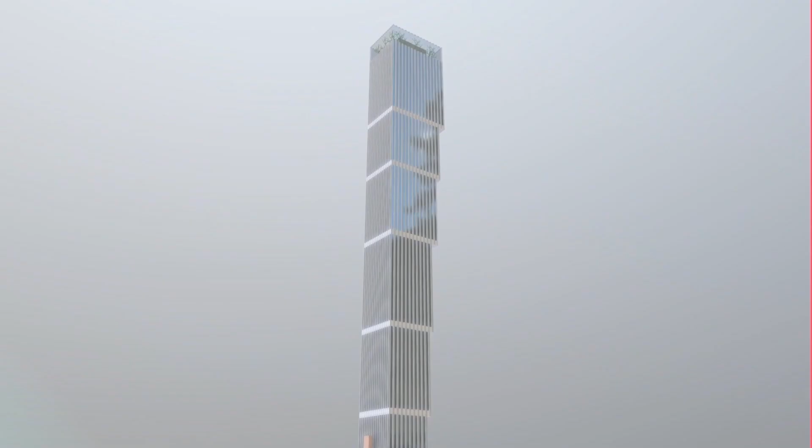Rarely do you encounter soaring towers and skyscrapers that live up to their name, but the ones we'll show you today are definitely scraping the skies. From a building that has a garden on the top to a skyscraper that has an alien-like appearance on the outside, let's take a look at 5 of these architectural wonders that we may never see on this planet. You heard it right, these mega projects are so impressive that even in a future that seemingly everything is possible, their realization is still unsure.

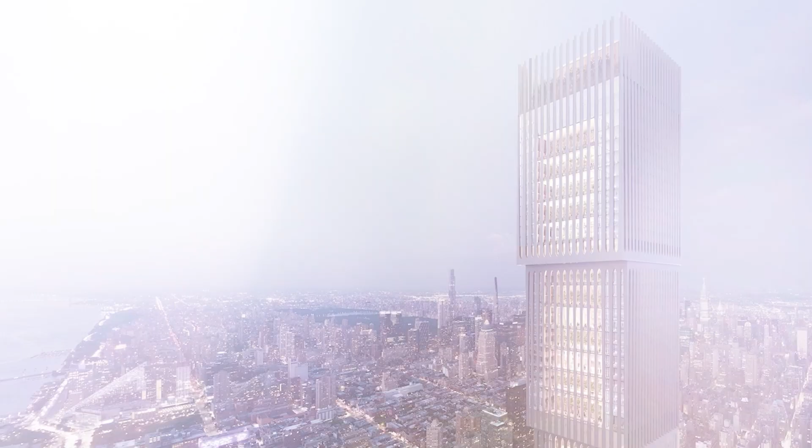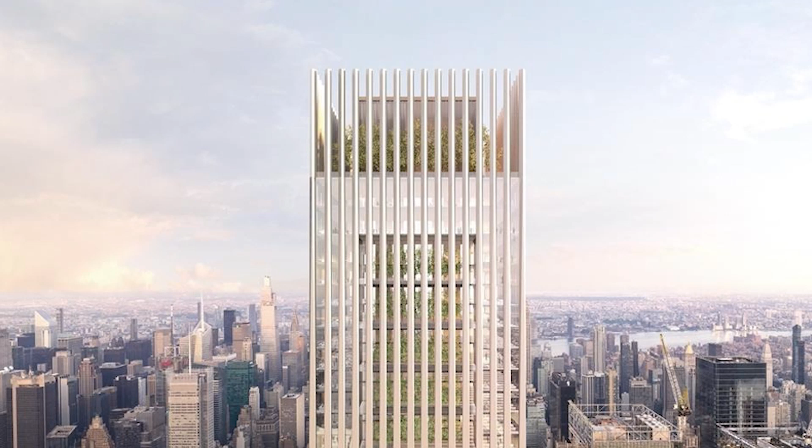Affirmation Tower. For some time now, the most talked about project that is on hold in the city of New York is the construction project of the Affirmation Tower. This 1,663-foot super tall mixed-use tower is planned to be built at 418 11th Avenue. The 2 million square foot structure would easily take the title of the tallest building in New York. Its seemingly upside-down appearance would definitely grab your attention, but it could also be why its construction is constantly getting delayed. If we ever do manage to see its finalization, we would all be in for a treat.

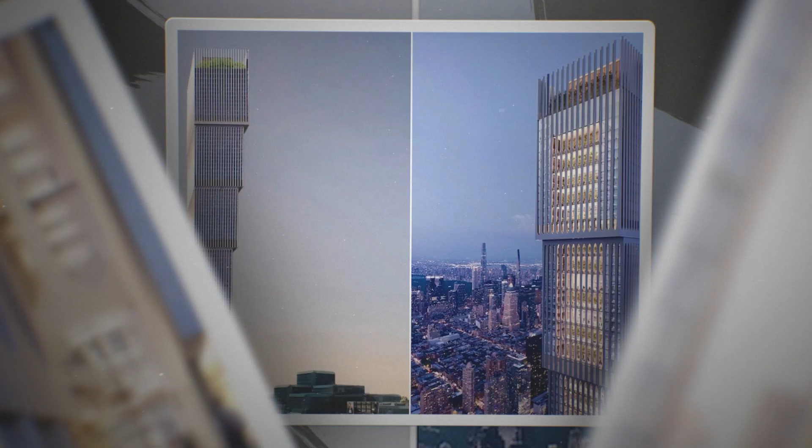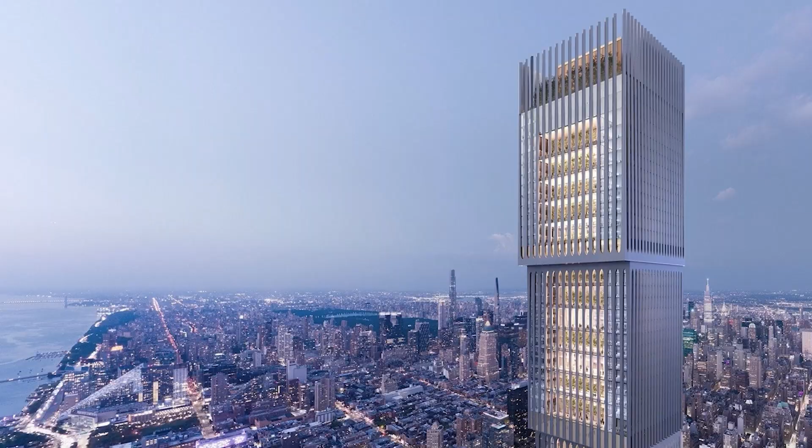Its initial plans called for the super tall Affirmation Tower to yield 2 hotels, an observation deck, a theater, public outdoor space, and office space, part of which would house the future headquarters for the National Association for the Advancement of Colored People. Developers projected the creation of 30,000 jobs in the building's construction, with 15,000 becoming permanent after its completion, and forecasted the property would generate over $5 billion in tax revenue for New York City and state over a 30-year period. The fact that entrepreneurs from minorities and female-owned companies would be among the Affirmation Tower's earliest tenants solidifies its goal for inclusivity.

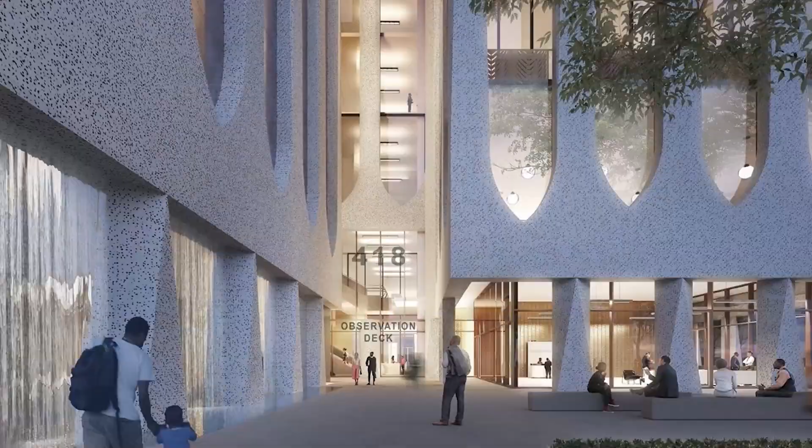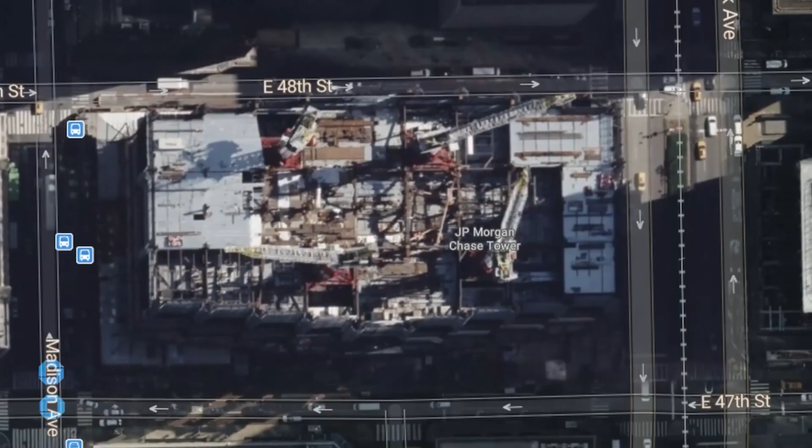Efforts to reboot the project resumed, with the concession of adding affordable housing at the expense of office space. It is unclear at the moment if a new building permit will be submitted, abiding by the new programming guidelines. It's important to note that the Affirmation Tower was developed by Don Peebles and designed by Ghanaian-British architect Sir David Adjaye. The Affirmation Tower is the work of a majority black team, including those funding the project. This project is a rare opportunity that has to be used, as it'll make the world's most iconic skyline more inclusive than it's ever been before. Its completion would be a testament to the power of unity and inclusivity.

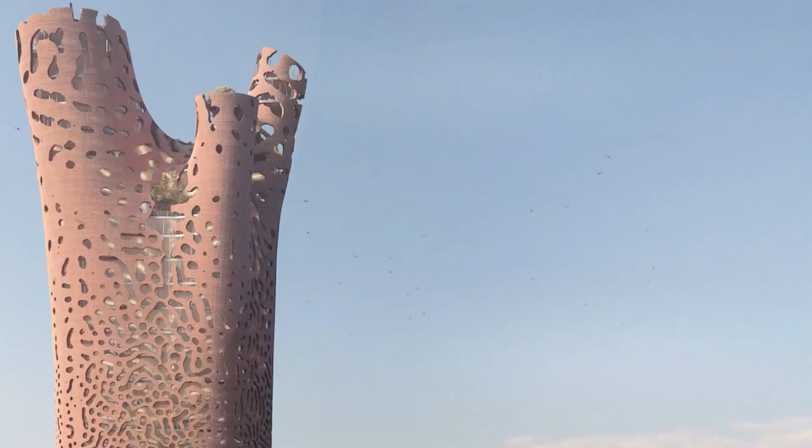Tower of Life. This next tower has such huge ambitions that it might not just become a benchmark for a country, but for a whole continent. We are talking about the unique Tower of Life, a project recently presented for construction in the city of Dakar, the capital of Senegal. This tower, as we can see, represents a tree, so it's safe to say its realization might bring forth something awesome, hence the nickname the Tree of Life. Planned to be 950 feet high with a bulky diameter of an amazing 165 feet.

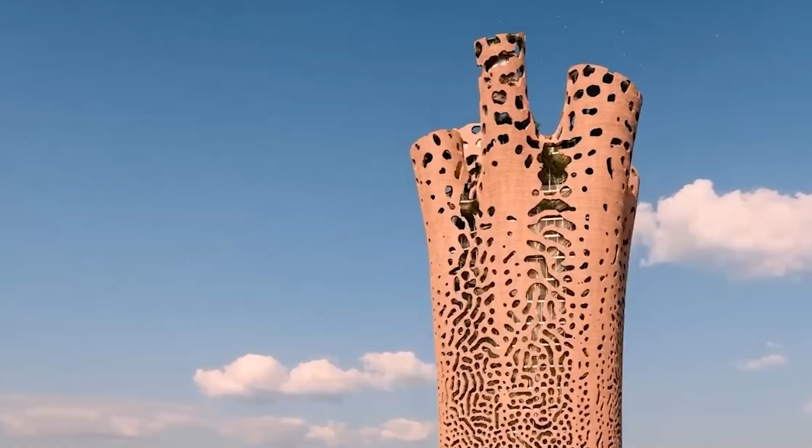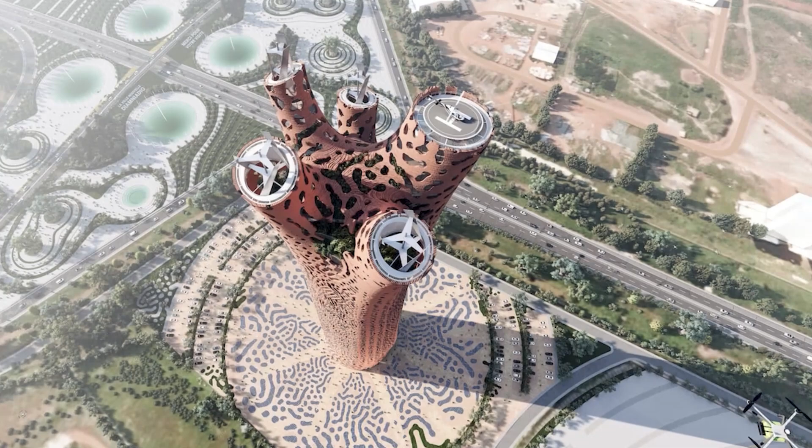This unique design that we see is not only impressive because it's similar to the baobab tree which grows in many parts of Africa, but also because of its facade, whose pattern designs respond to the shapes of an animal print. Its appearance is so convincingly biomimetic that it's also reminiscent of the large termite mounds typical of the African continent. Everything about this impressive structure, designed by Ali Basbous, screams the word Africa. This tower will be used for offices and public spaces. It'll also have numerous landscaped areas and, on the upper floors, a forest of indigenous African flora. It'll also have a heliport and vertical takeoff and landing area for drones, and many more cool and unique uses.

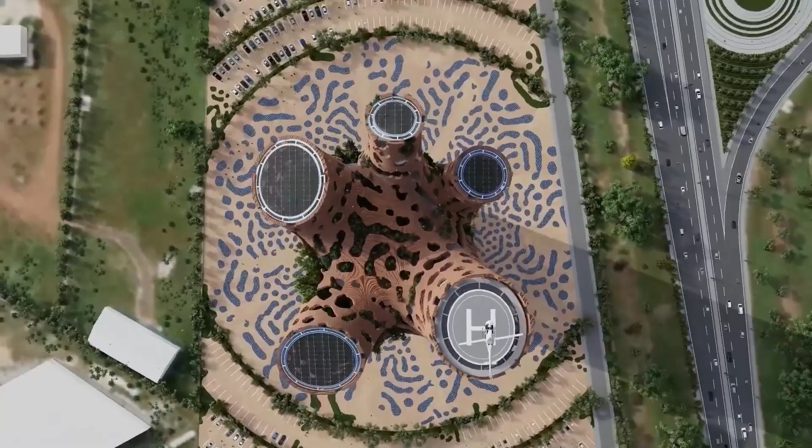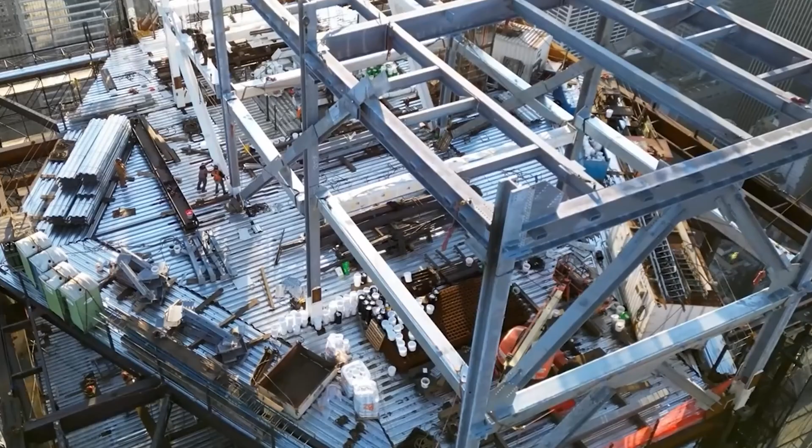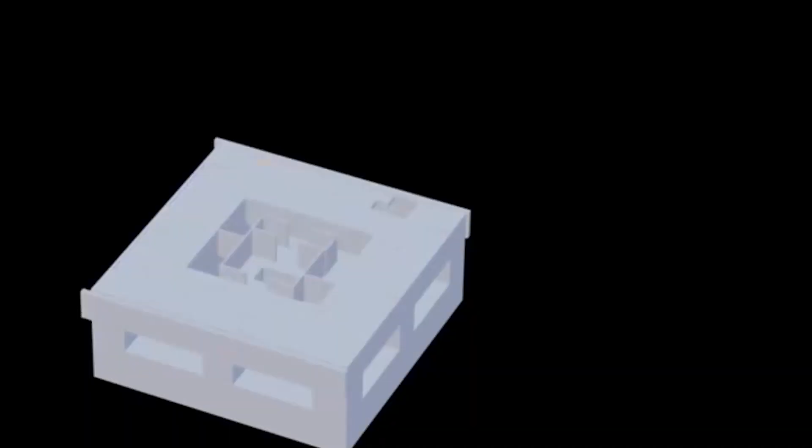The SRG Tower. Let's now take a trip to the luxurious city of Dubai, in the United Arab Emirates, or as we know it, UAE. Here, the tower with 2 wind turbines included in its structure, at an astonishing height of 1,550 feet, is planned to be made.

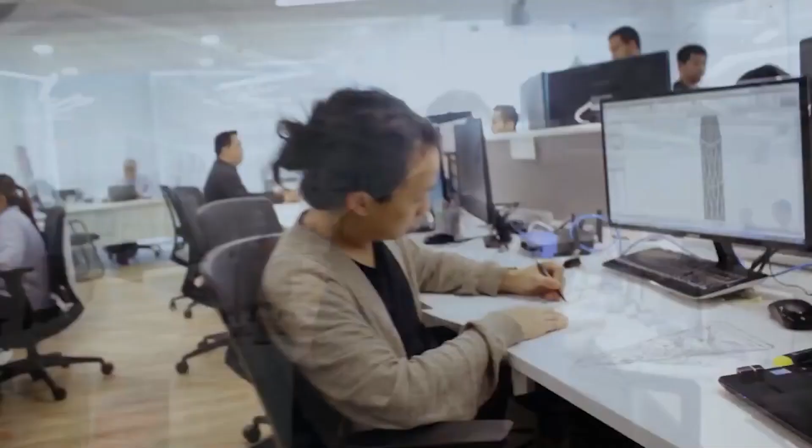Introducing the SRG Tower. This 111-floor residential mega project has been designed and architected by Killa Design. The group is famous for creating more than one architectural marvel in the city of Dubai, with a mission to create innovative buildings that are timeless, environmentally sustainable, and contextually inspired. The SRG Tower fits perfectly in this mission.

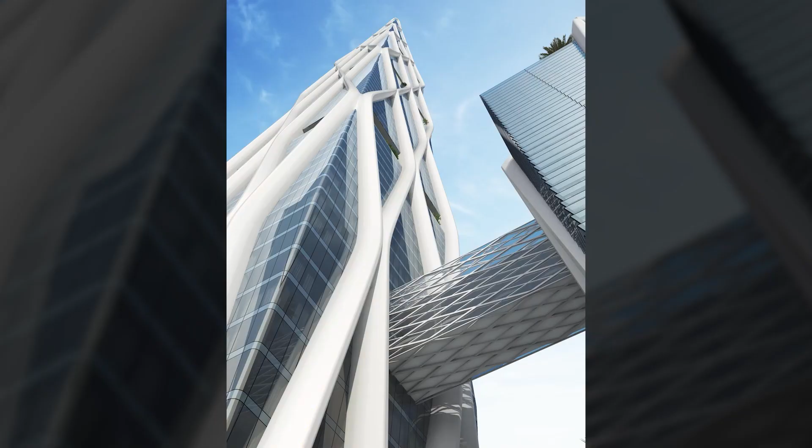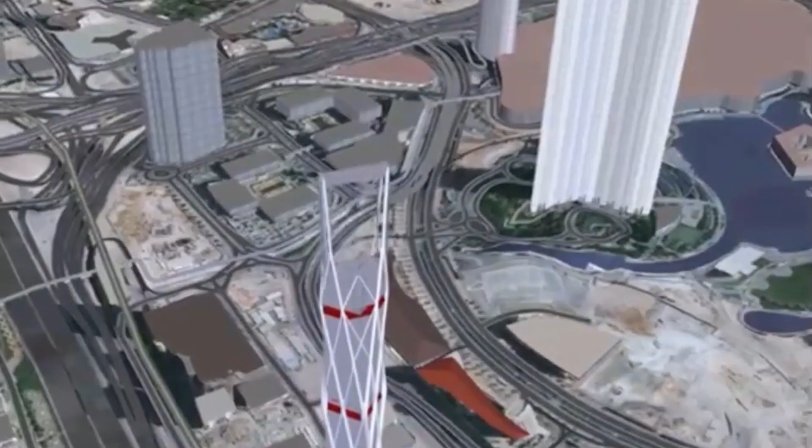Not only does it add to the uniqueness of the building, but it's also highly efficient in resolving lateral wind loads, slowing the wind across the building, therefore reducing negative pressures behind it. The design reduces the weight of the building and foundations by up to 22%, and reduces direct solar gain to the facade by 30% compared to a fully glazed curtain wall facade. The turbines are designed to create 500 kilowatts peak energy.

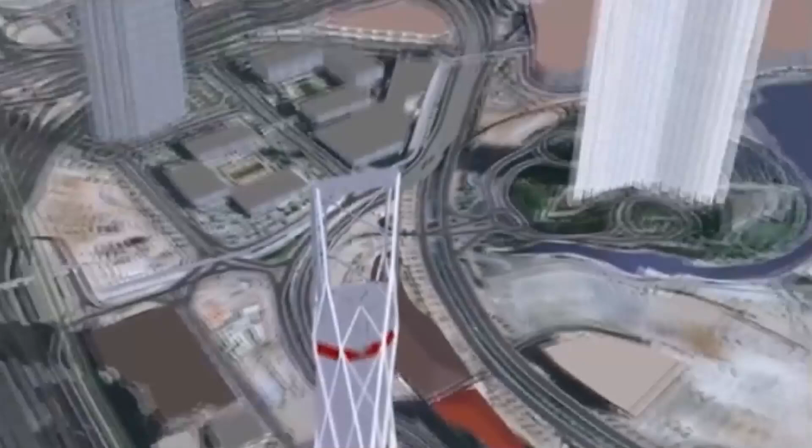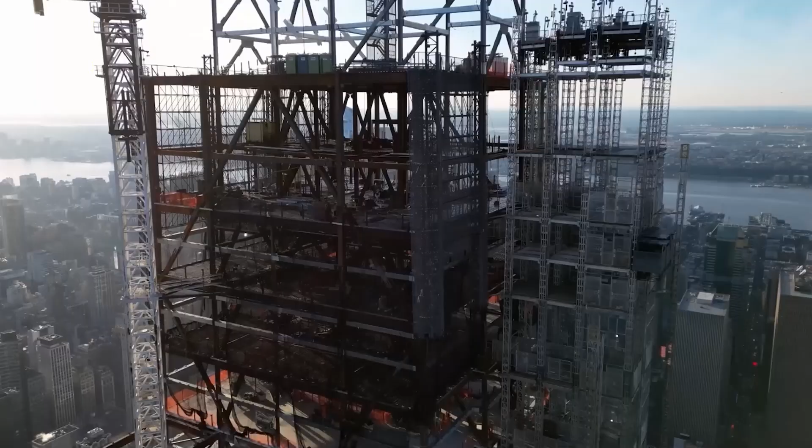The SRG residential tower includes an adjacent car park building, with the top of the tower not only featuring 2 wind turbines, but also a remarkable viewing platform, offering uninterrupted views of iconic projects in Dubai such as the Burj Khalifa, Dubai Opera, Downtown Boulevard, as well as the Arabian Gulf. The construction has been delayed multiple times due to factors like construction disputes, design changes, funding issues, and technical and environmental challenges. Hopefully one day the SRG Tower will join the rest of these mega projects.

The same can be said about this next mega project, whose appearance will have you scratching your head.

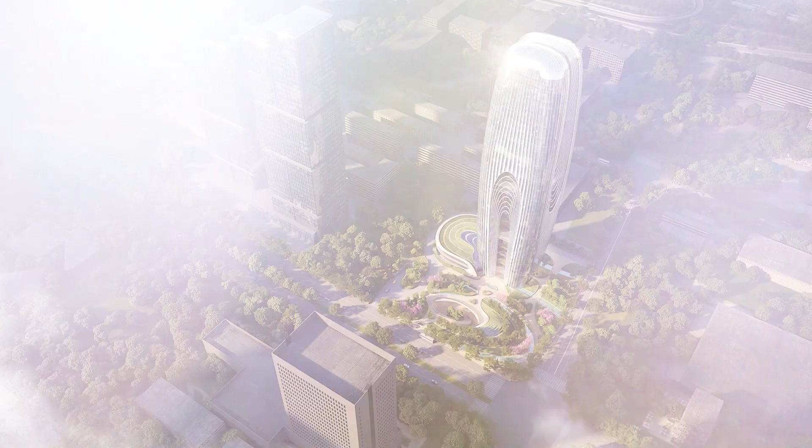Now let's go to China, where we will present our next skyscraper, Daxia Tower. We have a tower that's set to be the crown jewel of Xi'an, one of China's largest inland cities with a population nearing 9 million people. We're talking about Zaha Hadid Architects pursuing the construction and hopefully one day the completion of the Daxia Tower.

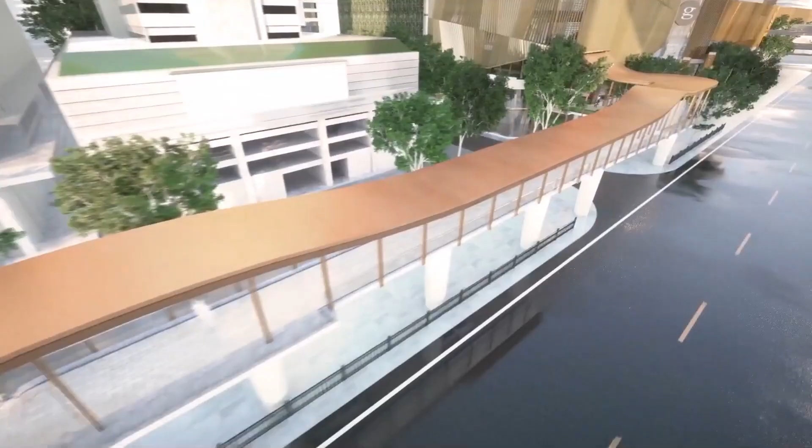The tower will mark the center of Xi'an's business district. It will include offices, retail, and ancillary facilities, all designed with data analytics and behavior modeling to ensure a balanced disposition of spaces. Speaking of space, there is sure to be plenty of it, as this tower represents an urban jungle. Rising to a height of 690 feet, the Doxia Tower will span an impressive

417,388 square feet. Multi-story atriums are designed around the building to bring natural daylight into the floor plates, while interior planted terraces take cues from mountainside waterfalls. The integrated greenery also helps purify the air, fostering a healthier indoor environment.

The structure is also adapted to the challenges of Xi'an's temperate continental monsoon climate. Optimized daylight and incorporated natural ventilation ensure high performance and low emissions during the building's lifespan. All of that, combined with a rainwater harvesting system, ensures that this mega project is not only planned to look like a thing from the future, but to operate as well.

Doxia Tower's design targets LEED Gold certification and the highest 3-star rating of China's Green Building Program. This would ensure that this structure truly joins the rest of the skyscrapers from this list. But due to this fact, it's also having construction issues, as perfection requires a lot of money, time, and effort.

Turnery Tower. You would be surprised to know that the people of Shanghai might be the ones who will truly be first to enter an alien-like residential space. The Turnery Tower is just that. For the time being, it only exists on paper, but if it is built, it'll be the 5th highest building to soar upward into the sky in Shanghai.

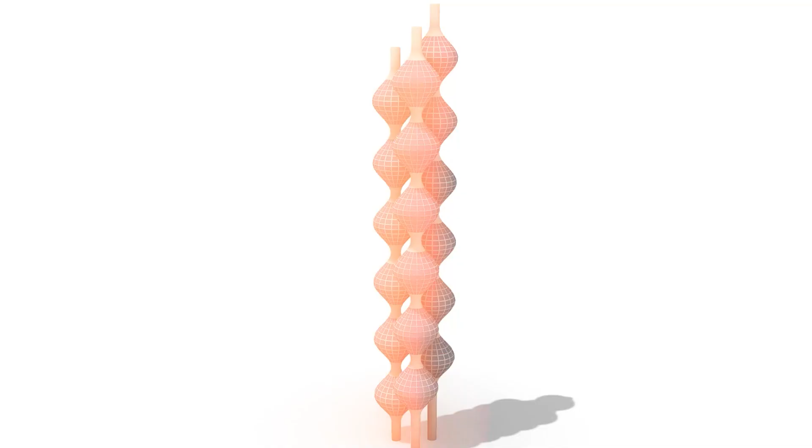Strictly speaking, it isn't just one single tower. The Turnery Tower actually consists of 3 separate pieces, every piece rising above the height of 1,310 feet. With their shape alternating between one another, the 3 sections seem to mutually complement each other, forming a unique silhouette not seen anywhere in the world so far.

A reinforced concrete core with steel corbels will enable the Turnery Tower to achieve its intended elaborate shape. The construction concept also emphasizes that it's important that the 3 separate towers are assembled at the same time during production. The Hayri Atak Architectural Design Studio is aiming to create something truly innovative, a livable piece of art.

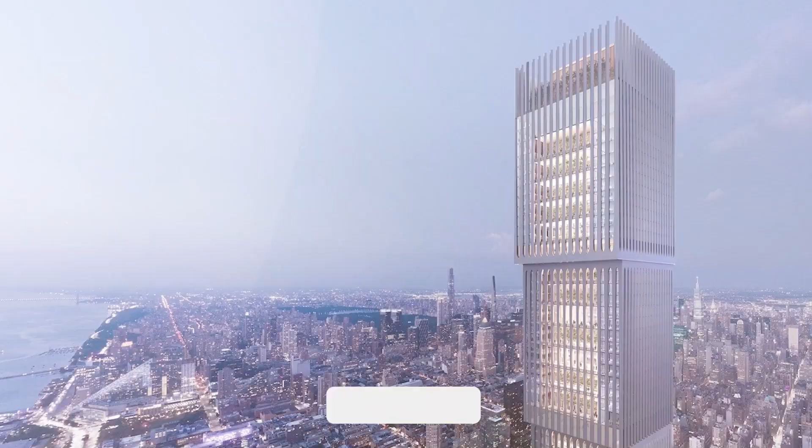It's no surprise that it exists only on paper, but should we see this structure on our planet, it's certain to be a sight for sore eyes. That being the case, it's hard to see a future where we will see all of these skyscrapers built on our planet. But if one of these megastructures were to be created, which one would you most like to see?